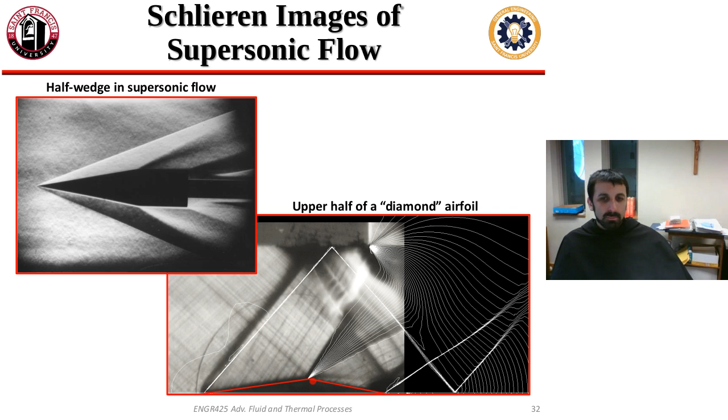Because we know that an expansion fan, like that thing, we know that's not a shock wave, but we were describing it using Mach waves, which would be like these constant pressure lines that are marked out here. So, like, what are Mach waves?

What are those? That's a line where there's constant properties of the speed of sound. On that line, it's probably true. But like, put it this way, why do we care about it? Like what is it? What defines a Mach wave?

It deals with the geometry of the way it's moving faster than the speed of sound. I know that, okay, cool. So, the line, you're right, along that line you have kind of constant properties, but that line also precipitates... it's a way of demarcating a disturbance.

So last time we talked about flow comes up to this corner here going, and it's flowing that way. Then after the corner, it's flowing that way because it has to follow whatever the local geometry is. So around that corner, it's turning somehow, going from one direction to another. And when it turns, we see this expansion fan pop out. This expansion fan, as you said, is made up of Mach waves, these lines of constant pressure, which you said are really lines of constant property.

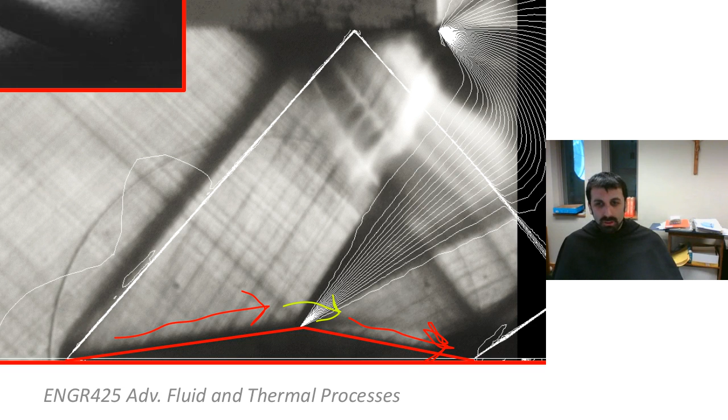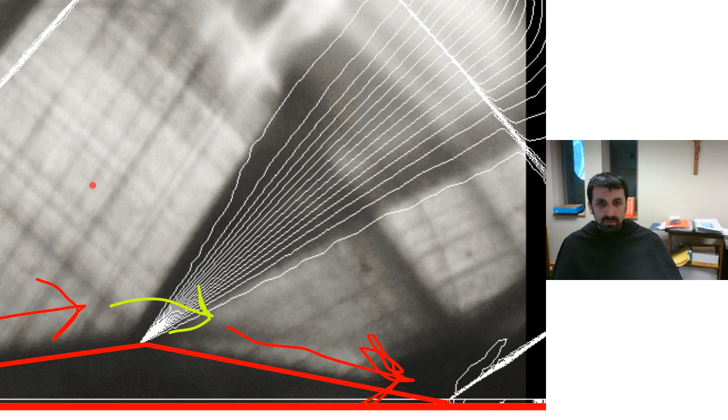If I zoomed in really far, that's about as far as it lets me zoom in. Let's pick a point up top here. So you have flow moving this way. As we go through the Mach wave, my direction changes a little bit every time I go through another Mach wave. It's not that exaggerated here because I'm only changing direction a little bit, but I'm exaggerating to make a point. Each time I go through a Mach wave, my direction changes a little bit.

So in order for my direction to change, that means there has to be a pressure disturbance, right? If there's not a pressure disturbance, then velocity doesn't change. We know that from subsonic aerodynamics too. In order to affect a velocity change, you need a pressure change. So there's some relationship intuitively between these Mach waves and pressure.

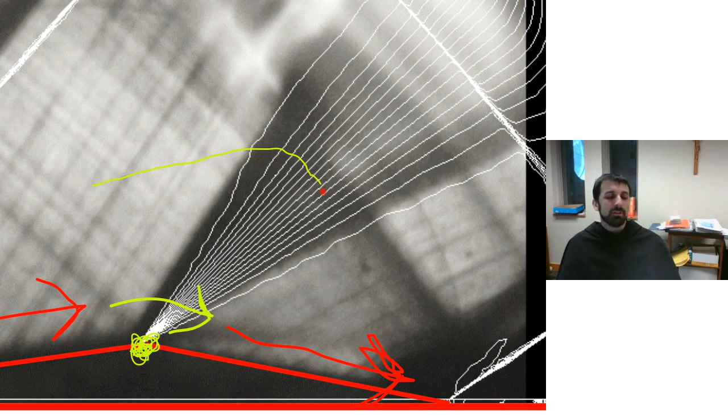That's thing one. What we looked at last time specifically was, okay, if we have something that creates a pressure disturbance, like an object moving faster than the speed of sound, or an object moving through air, or here we have a change in geometry. It's kind of the same thing. We're forcing the air to do something different. Whenever you make the air do something different, it means there has to be a pressure variation in order to make the air move differently around the disturbance.

The disturbance in this case just being a change in the slope of this body here, going from there to there. You following me, Ian? Does that make sense?

Yep. Cool. All right.

A Mach wave is related to a pressure disturbance. You might imagine the larger the pressure disturbance required to change the flow velocity, that might end up being a shock wave on one hand.

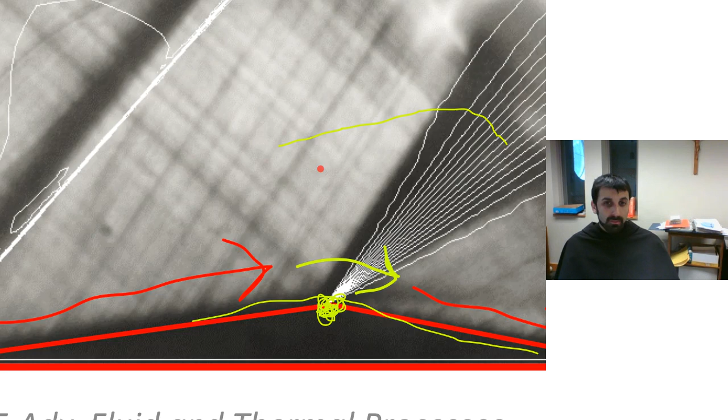If it's like a compression corner, the flow has to turn into itself, so nature creates a shock wave to handle that. Or if you're expanding, you end up with something much weaker, which would be these Mach waves.

But you don't end up with just one of them, because even though it's a sharp corner, the flow is not just turning on a dime. It has to smoothly change from one point to another. Even through a shock wave, there's some thickness to the shock wave.

So here it's not just one Mach wave, it's a whole family of Mach waves. It's an expansion fan containing many Mach waves.

So when I go through one Mach wave, it's only some small pressure disturbance that only turns me so much. Then I go through another one, generated by another pressure, representative of another pressure front that turns my flow a little bit more. Then I have another pressure front, turns my velocity a little bit more, and so on and so forth.

In other words, these Mach waves are pressure fronts. That's kind of how you can think of them. They're indicative of a pressure variation that's going to change the velocity of the flow.

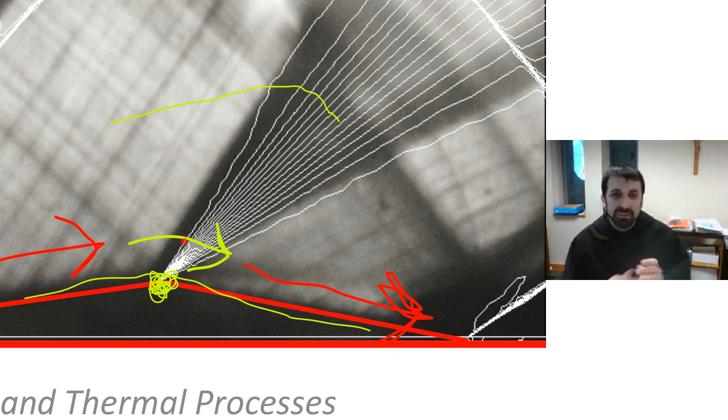So now that we have those, the question is, can we solve stuff? All right, let me dump all that. So let's say that we got some flow coming in here.

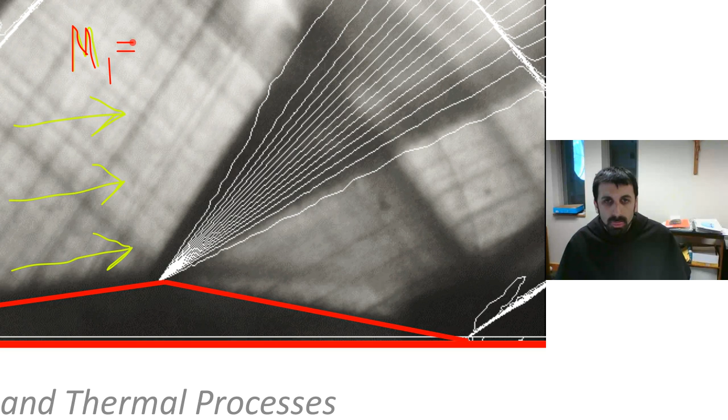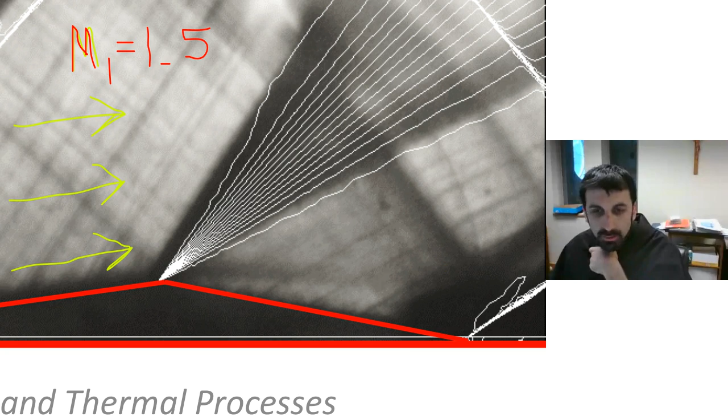And that flow's moving at Mach 1.5. Let me draw this on a piece of paper, and then it'll be easier for you and for me.

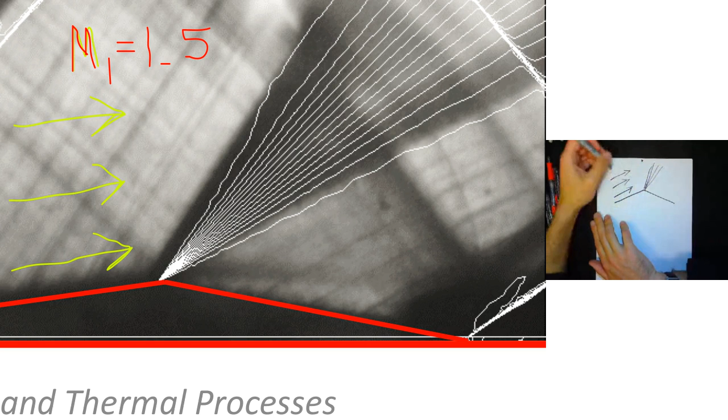Some expansion fan there. This is condition 1, that's condition 2. M1 is 1.5. Pressure in that region is 1 atmosphere. Temperature in that region's 288 Kelvin, so essentially standard pressure and temperature. And that flow is expanding around a sharp corner, the angle theta, say that that's 15 degrees.

Question is, what are all these properties in state 2?

And my marker is starting to die. Yeah.

All right, so that's what our problem is. So what was our procedure for working this last class? What were we talking about?

We set up some of the things that we did with the shockwave, and then we set up the integrals with the theta.

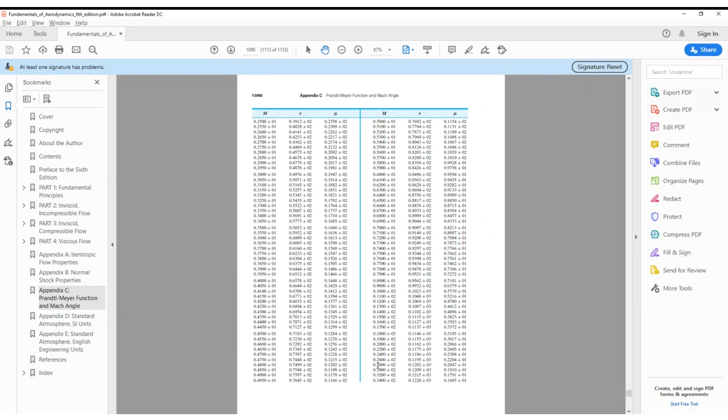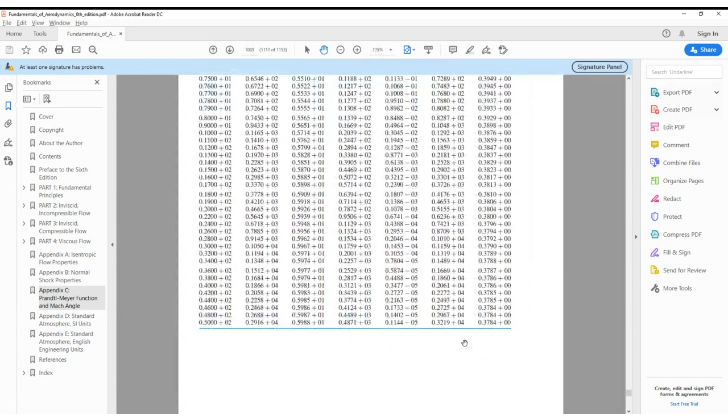I think it's just 2.05, Mach 2.05. Oh, I see what you're saying, you're averaging them. Yeah, good. So that means our downstream Mach number is about 2.025.

Which is weird, right? Uh-huh, because our Mach number went up. Yeah, and we expanded. That's weird. Usually, like in subsonic flow, the opposite would occur.

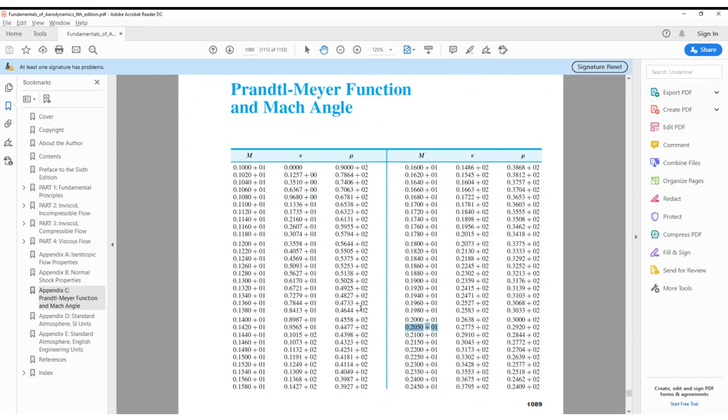You'd slow down. Well, let's figure out how much we actually sped up by, because Mach number normalized is our velocity normalized by the speed of sound. So let's see if we can get the speed of sound and go from there. So if I know my Mach number, how do I get all the rest of my information, like pressure or temperature or whatever?

Can we use the things we made before for crossing shockwaves to figure out? Not across shockwaves, because I'm not going across shockwaves, it's isentropic flow. So we know M1 is 1.5.

And M2 is 2.025. We also know that going from one state to another, say for temperature, if I look at my ambient to total temperature ratio, that's something we have an isentropic relation for, it looks something like that. So I can write that for either one of these, and I know the total temperature is staying the same. Is the total pressure staying the same too? Yes, yeah.

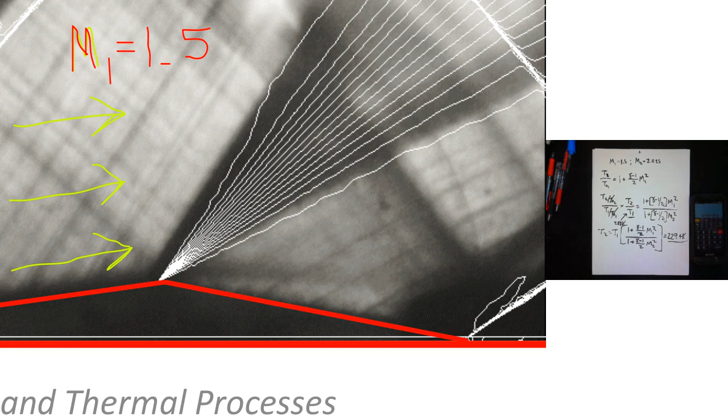Squared divided by 229.4. Yep, that's what I got. Sweet. All right, so that gives us the temperature.

Let's get pressure while we're at it. So it's the same deal, except we raise it to the gamma over gamma minus 1 power. Sorry, it's kind of sloppy there, I ran out of space. That's this whole thing, everything in brackets, that's all raised to the gamma over gamma minus 1.

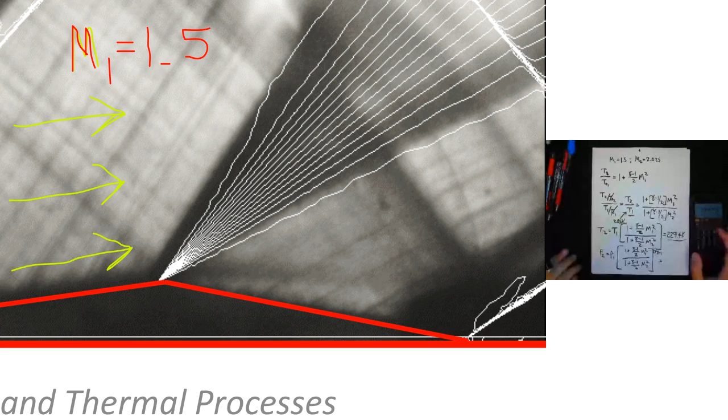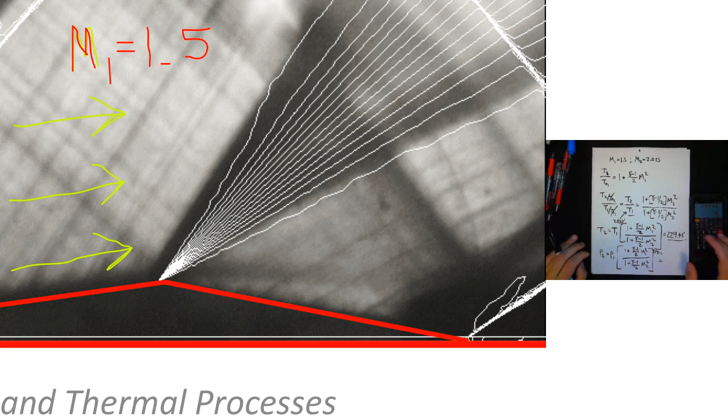So I can look at that. Let's see. 1, 2, yes. Yes.

You should get something like 0.45 atmospheres.

Yes, cool. All right, so we said that we were doing all this so that we could figure out how fast the flow is actually moving in each case. So how do we get that from a Mach number?

We want to get the speed of sound, right? So how do we get speed of sound in each case? The square root of gamma RT. You got it, so square root of gamma RT.

So let's see, 287, 1.4. Then first case it's 288 Kelvin. So it's 340.2 meters a second in the first case.

For those of you who don't like English units, unlike you, I know you're just trying to stand up for the little used unit.

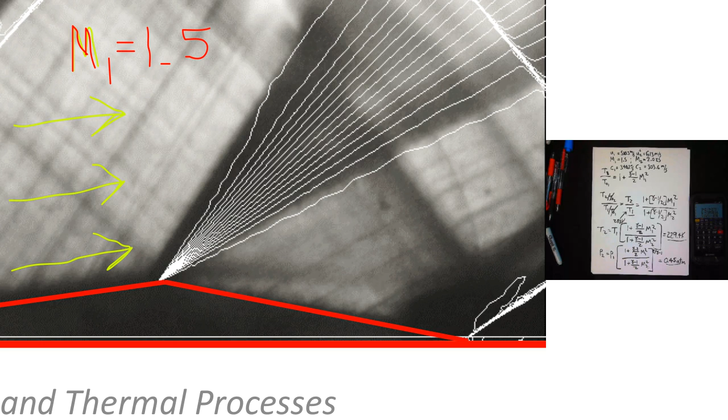So why is it doing it? Because it's supersonic flow and it does weird stuff. Well, that is a fair answer. Why does it do weird stuff? Like, yeah, let's jump back in time.

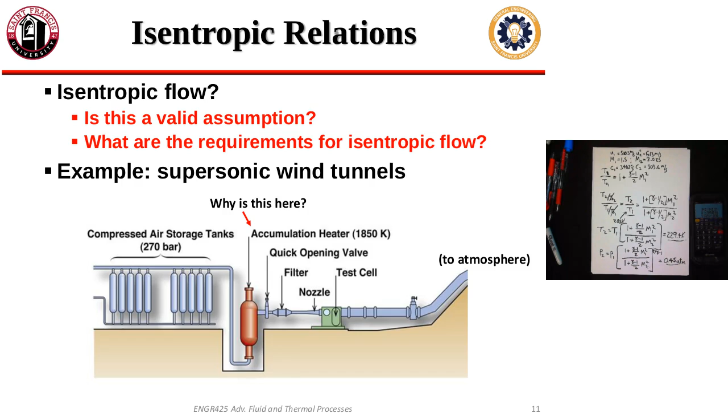It's in here somewhere, I know it is. Oops, too far. Oh, it's in here somewhere. Yeah, something like this, okay.

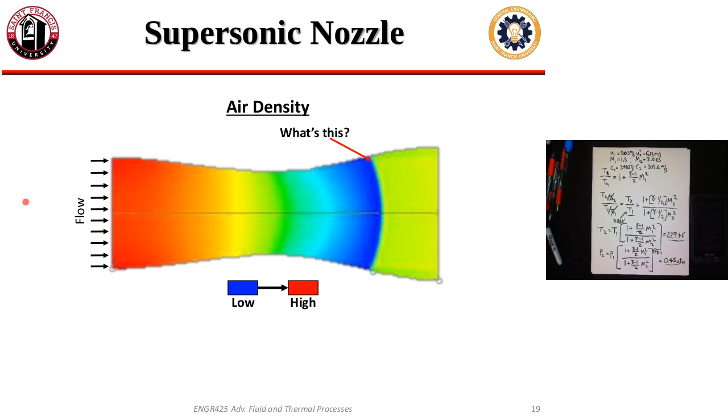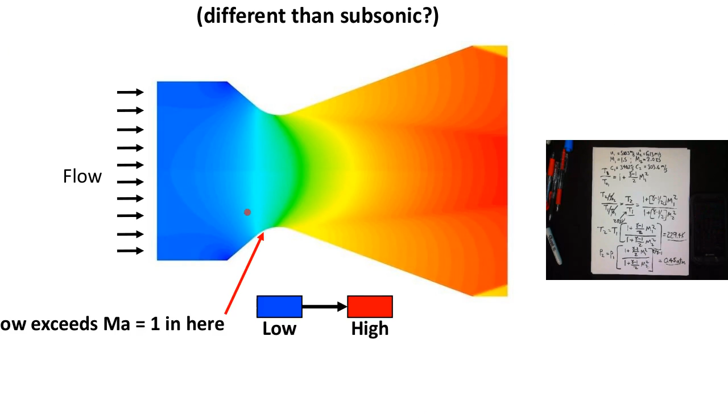So we have flow going through this nozzle, comes in subsonic, around somewhere in this throat region it goes supersonic. You keep on going. Oops, it actually starts to accelerate and keep on moving faster and faster and faster and faster.

Awesome, so we said that's weird. We said this wouldn't, if this is a subsonic nozzle, we'd expect the velocity to go back down as you went into this diffuser section, as you start to expand the flow again. But it's supersonic, so it's not doing that.

We did say that velocity changes occur because of what? Pressure differences, right. If there's a variation in pressure, there will be a variation in velocity. So in this case, say there's some pressure change here or some pressure down here.

That information is going to come upstream or it's going to go downstream at some speed. How fast is the pressure information, the fact that it's a higher pressure on this side or a lower pressure on this side, how fast is that information going to travel? Speed of sound.

Right, we're traveling faster than the speed of sound now, right? So that means that we're outrunning anything from upstream. We don't hear it, we'll never hear it. And anything that's coming from downstream, we're getting a lot closer to it before we see that too.

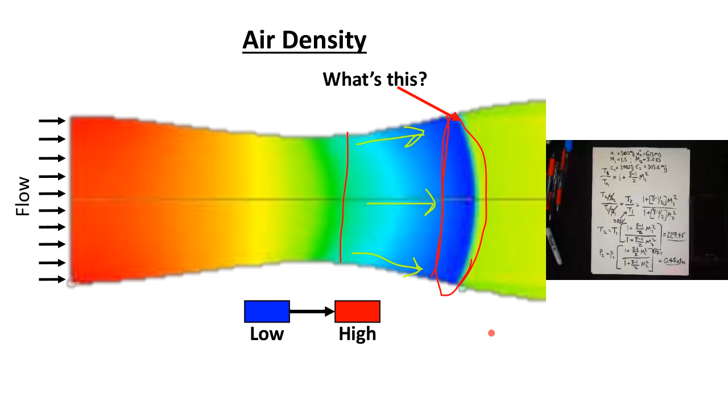So does that make sense? Cool, you can kind of see like the edge of it here. Like you see this guy? Yep, like you drew the ellipse out. That would be the shock wave. Yep, that'd be a shock wave.

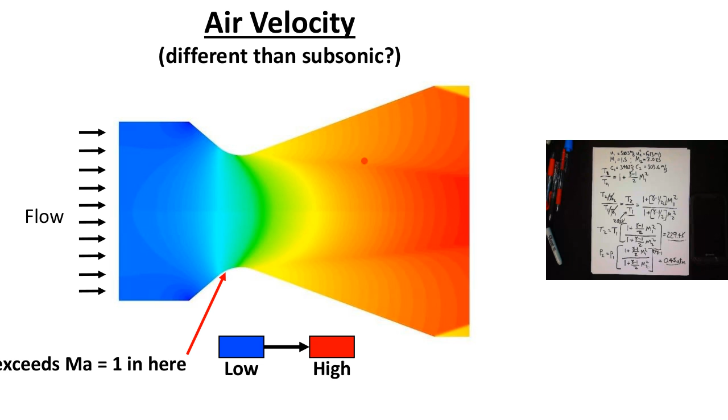You just get the edge of it because the flow finally ran into a corner that said, 'Hey, there's a thing here, change your velocity.' So there's a shock wave in order to force that change in velocity. All right, so that is that—that's an expansion fan, and that's expansion waves in a nutshell.

Our next step is going to be putting them all together with some airfoils and talking about how that works.

But let's pause for a second. We've got about a half hour left. Do you have any questions that you would like answered or problems you'd like to see worked prior to the test on Tuesday? No.

Okay, note that the test will be on normal and oblique shock waves in addition to 3D aerodynamics, so like wings and stuff. All right, oh boy, no questions on that? Nope. All right, well in that case, let's keep it rolling.

You might have noticed that there's a new homework assignment posted. It's due essentially the last day of class, so you've got whatever time you want to work on it. It'll go through everything that we have done in shock waves, plus a little bit about airfoils, which will at least start today. If not, we'll finish it next week on Thursday.

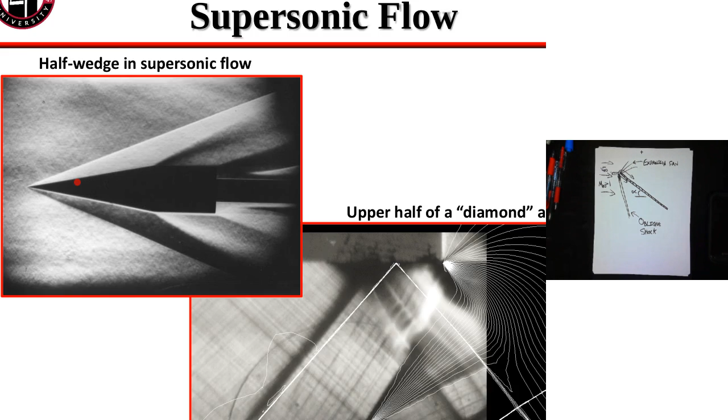And a shock wave on the bottom, which kind of matches with—if you go back to the slides, which call something like this, the wedge, where when the flow was coming in and it was forced to turn, when it turned into itself, which would be like this compression corner—that's what a compression corner is. When the flow's forced to turn into itself, it made a shock wave. And then when it turned away from itself, like over this corner, it formed an expansion fan because it's now being torn apart instead of being shoved together.

So we're just seeing that—if you go back to the document camera, on a flat plate now, on an airfoil. So if I wanted to figure out, okay, what the lift and drag of this thing are, well I'd have to find the pressure, say, here and here, right? Above and below the airfoil. Those look like good spots. Cool, good, because there aren't any other spots.

So if I'm trying to find that, say P1 is 1 atmosphere. Let's say that Mach number for the free stream is Mach 3. So how do I figure out P2?

We do the relations across a shock wave. Sweet, okay, so how—but not any shock wave, an oblique shock wave. Yes, across an oblique shock wave. So I know my upstream Mach number, but if I'm thinking of relations across the shock wave, all of them needed what? Theta, beta. Right, so how do I get theta? What is theta? So would theta be the angle of attack? Why? Just thinking about like parallel included angles there. Yeah, oh, like if alpha was 0, the flat plate would be like that.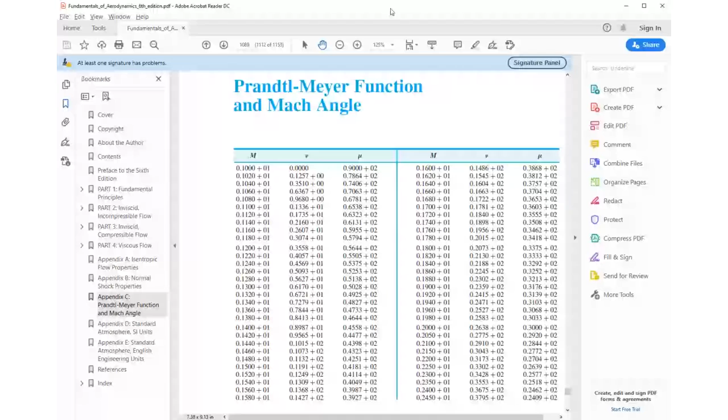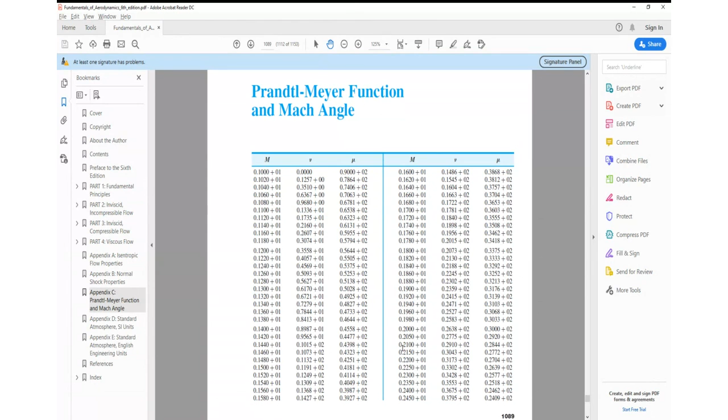Okay, you see the book? Okay, so this is the Prandtl-Meyer function at a particular Mach number, right? So the free stream Mach number is 3, right? And I know that the turning angle is the difference between the Prandtl-Meyer function before and after the expansion fan. So I can look at the Prandtl-Meyer function. Here we go, at Mach 3 the value of the Prandtl-Meyer function is 49.76.

I can run the numbers through the equation, or I can just look it up here, and it honestly doesn't make a difference. It's the exact same thing. One just gives you a little bit more flexibility.

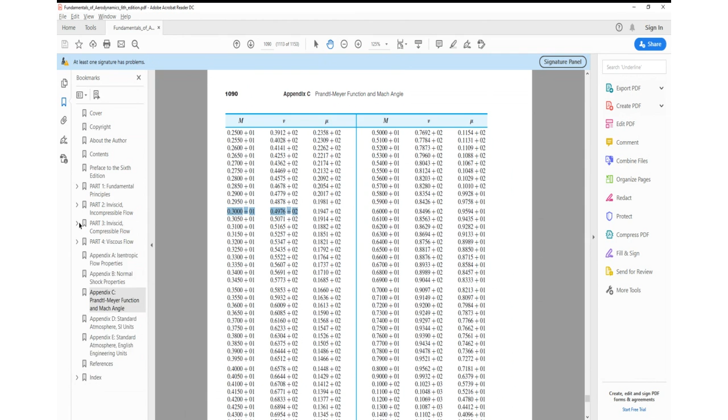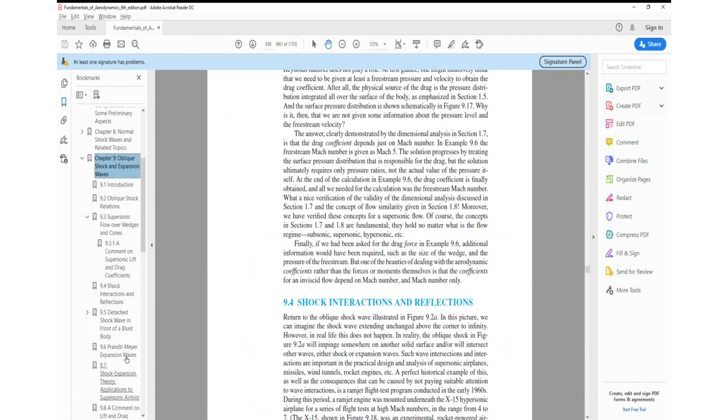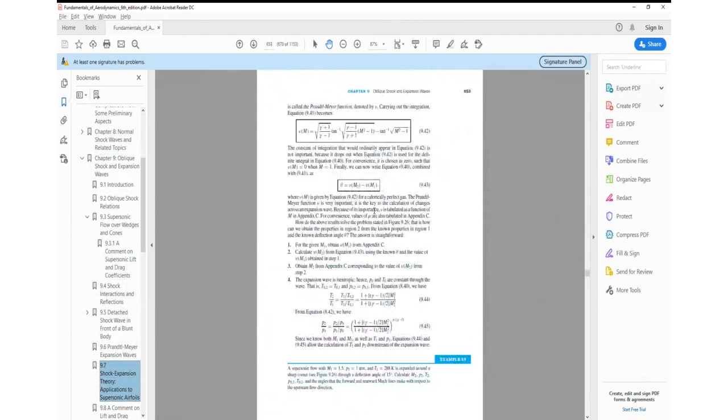Okay, so there's my value of the upstream Prandtl-Meyer function. I know that... hang on... here we go... I know that the Prandtl-Meyer function downstream minus the Prandtl-Meyer function upstream is equal to my turning angle. We said that my turning angle is the same thing as my angle of attack here.

So alpha equals nu at M3 minus nu at M infinity. So if I add my 49.76 degrees, which I just got from looking up the value of the Prandtl-Meyer function at Mach 3, and my turning angle, which is my angle of attack, 5 degrees, that gets me my value of the Prandtl-Meyer function for downstream of the expansion fan.

Make sense? Yep, cool. All right, so if I do that, it means my downstream Prandtl-Meyer function is what? What's the value of it? 54.76. Okay, so at 54.76, what's my Mach number?

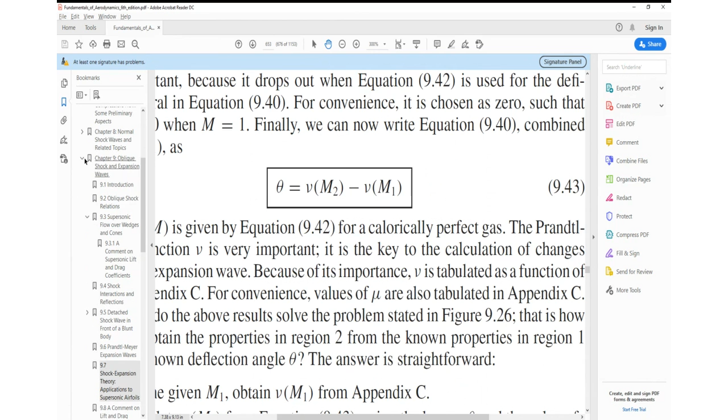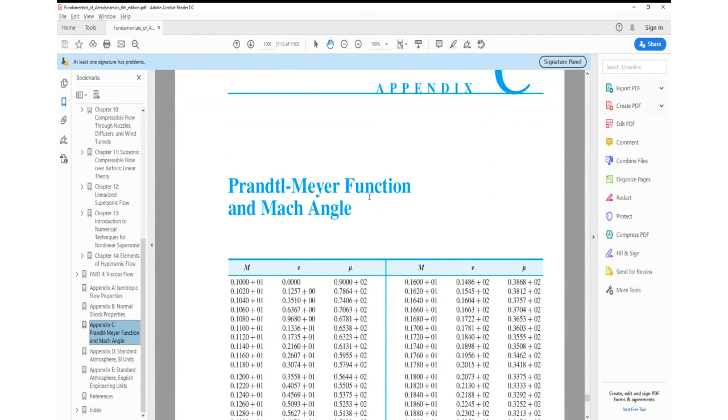About 3.25, more than that. Okay, so let's roll down here to 54.76. Yeah, somewhere in there, somewhere in that region.

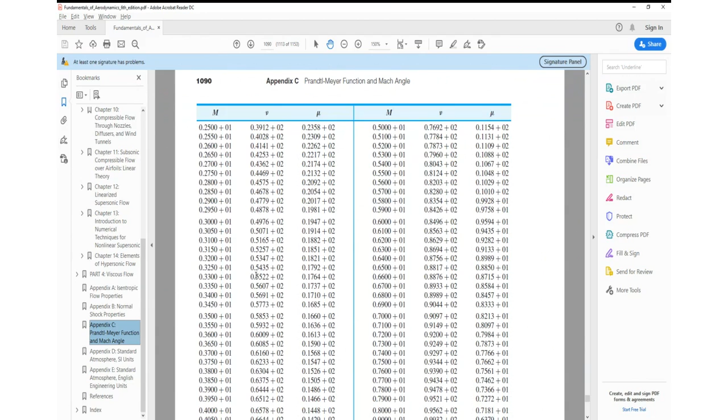So then we set the stagnation pressures equal to each other, and we use that formula to figure out what the Mach numbers are. So we know that I'm just looking at stagnation pressure. I'm going to, hang on, make sure I don't flub this relation. Hang on, there we go. I know that if I'm looking at an isentropic flow, the ratio of pressure to stagnation pressure to ambient pressure is this. And we know that stagnation pressure is constant in isentropic flow.

So if I say those are going to cancel out, we got P2 over P1. And that's going to be equal to 1 plus gamma minus 1 over 2, M1 squared, over 1 plus gamma minus 1 over 2, M2 squared, raised to the gamma over gamma minus 1.